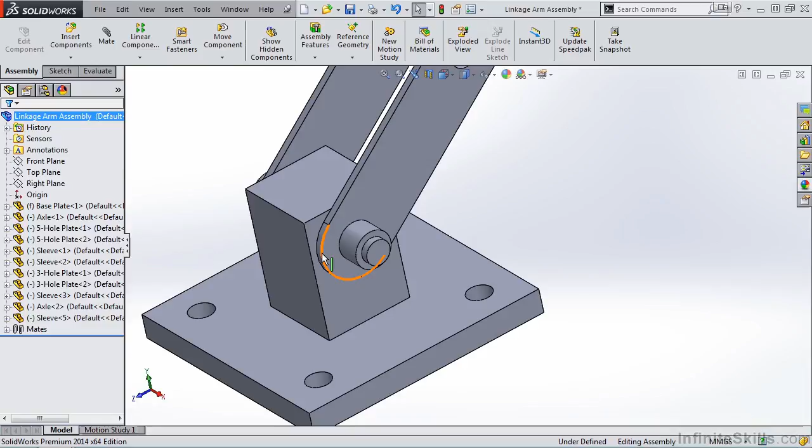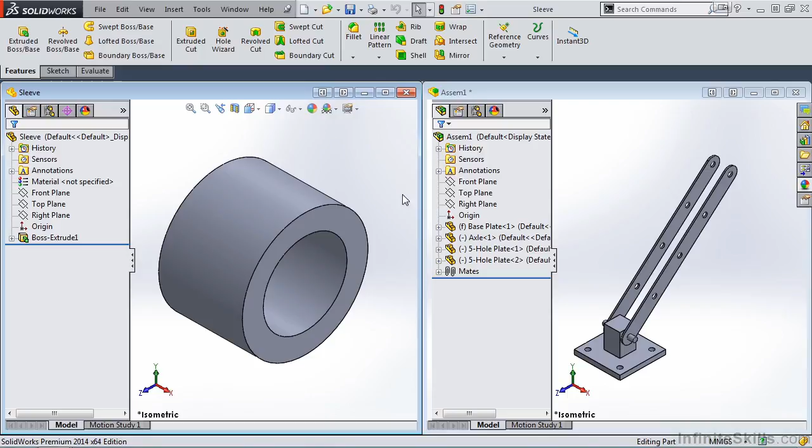That's a lesson that we covered a while back. In order to create the windows, we need to first open the sleeve part file and then select the Windows drop-down menu and tile vertically. Now, this middle window here is my completed assembly. I am going to disregard that and simply expand the two windows, the part file of the sleeve and the assembly we are working on. So once you have these windows up on your screen, try to use smart mates and apply the sleeve to each end of the axle. So go ahead and pause the video and give that a try.

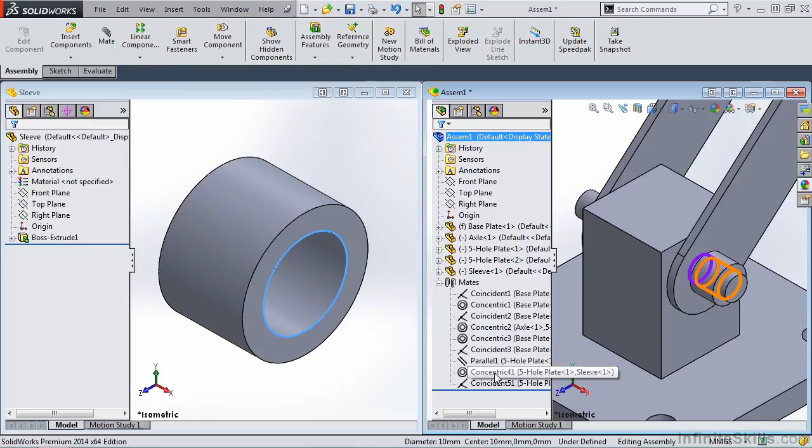Now let's see how you did. I am going to zoom in on this area so it's easier to see. To apply the smart mate, I am going to select this circular edge, hold down the left mouse button, and drag it until I receive the proper graphic and release the left mouse button. And the two mates are applied. In fact, if I expand the mates, you will see the concentric mate and the coincident mate.

We'll rotate the model, and let's do the same for this side. Once again, pretty easy. So now let's expand the assembly we are working in, fit it to the screen, and move on to the upper portion of this assembly.

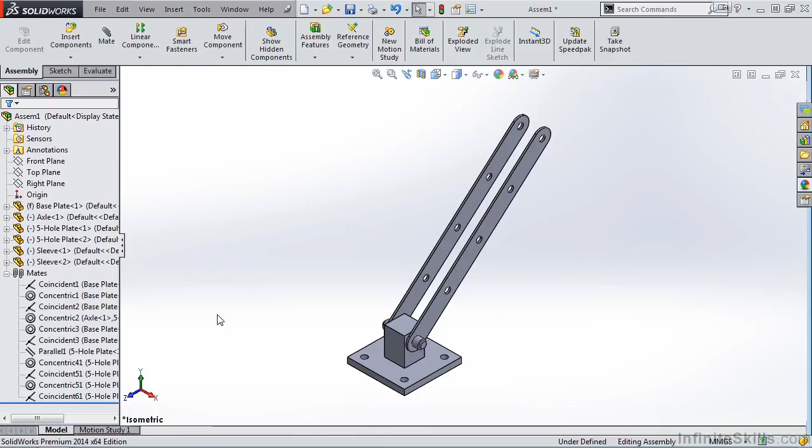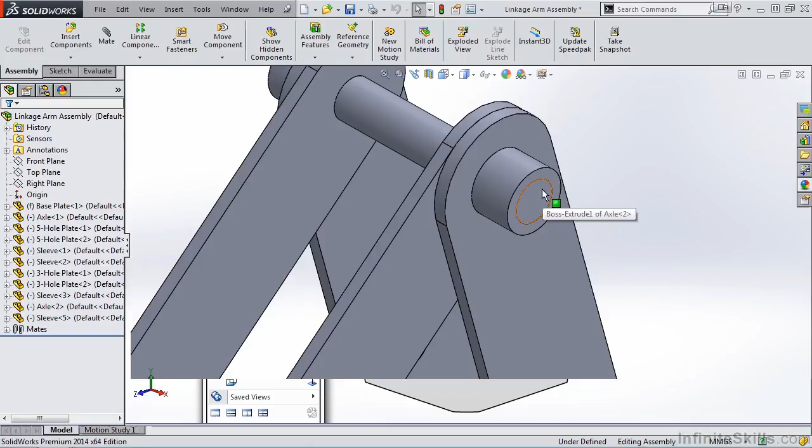Let's go back to the finished model and take a look at what we need to do. We need to insert the axle along with two 3-hole plates and two sleeves. Notice in this application, the face of the sleeve and the face of the axle are flush with one another. So once again, pause the video, insert those components, and after you have that completed, return to the video and we will step through it together.

Okay, welcome back. I am going to go into the assembly I am working on, and this time I will insert the component axle. I'll position it near the end of the 5-hole plate. This time I am going to use the width mate. And if you recall, that is under Advanced Mates. I'll select the width mate.

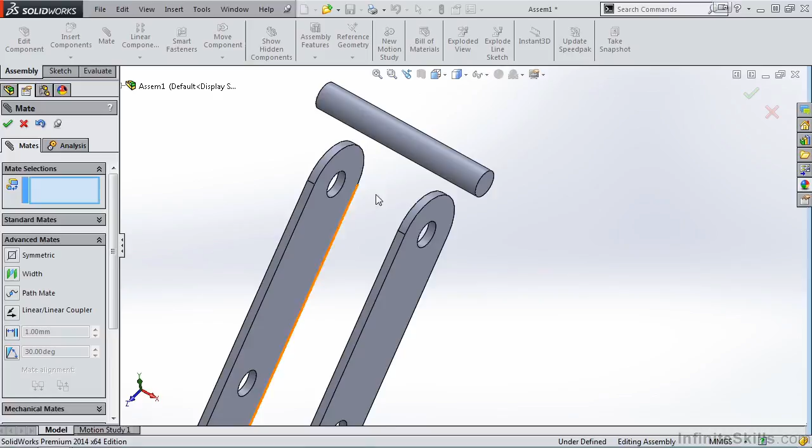And once again, we have the two windows. In the width selection, I'll select the outer faces of the 5-hole plate. And for the tab, I'll select the faces of the axle. I'll accept it and then apply a concentric mate. And now the axle is properly mated to the two 5-hole plates.

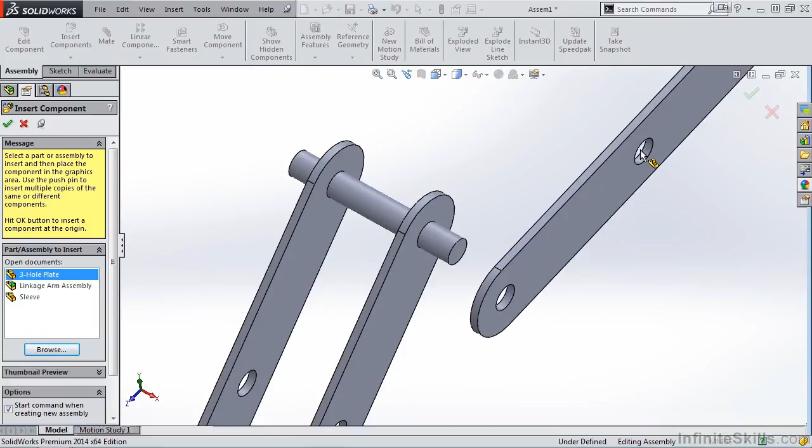Next, let's insert the 3-hole plates. I'll pin open the property manager. And as long as we're here, let's go ahead and insert the sleeves. And then close out of the Insert Component Property Manager.

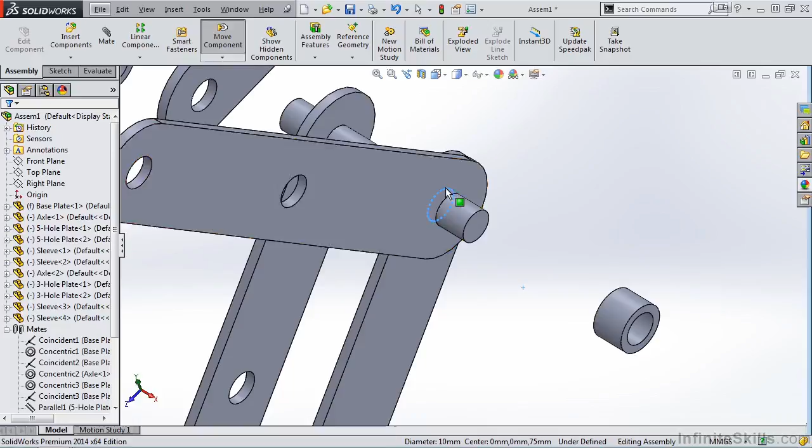So I am going to use Smart Mates just to speed up the process. I will hold down the Alt key. I'll select this circular edge and then this circular edge on the 5-hole plate. I'll roll the model. Do the same for the sleeve. Rotate the model. Let's do the same for the opposite side. And the collar.

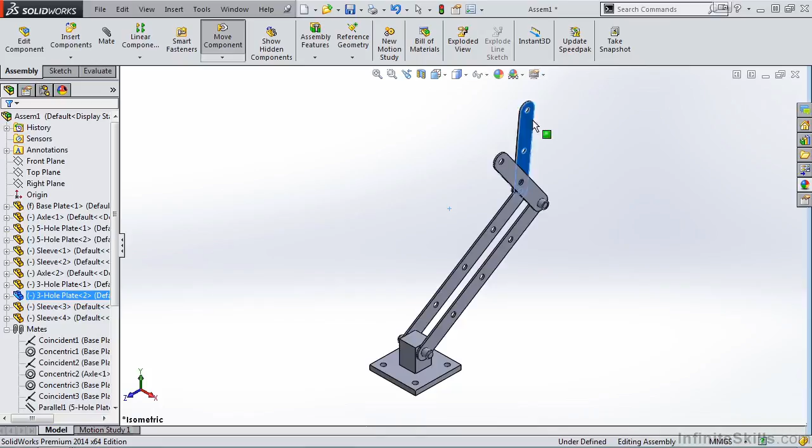We'll fit it to the screen. Let's rotate these couple components. And once again, we want these two 3-hole plates moving together. So I am going to zoom up and apply a parallel mate. And there we have the completed assembly.

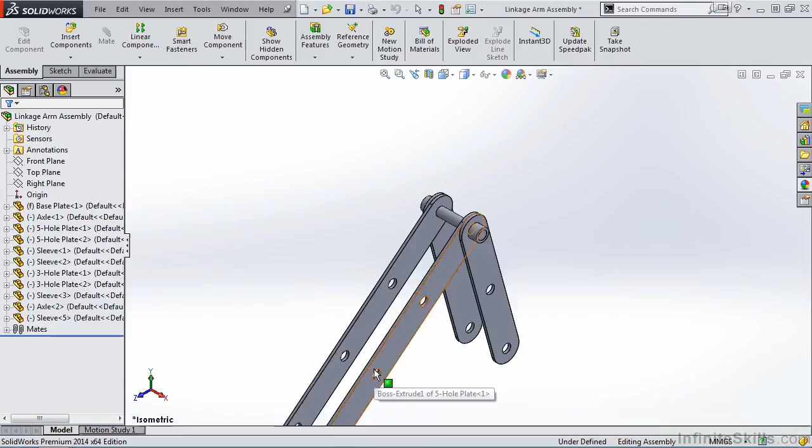Now I want to add a couple angle mates. So if we go back to the completed assembly and we fit this assembly to the screen, let's take a look at the angle between this 5-hole plate and the base plate. In order to do that, we need to expand the mates. And it looks like it's currently suppressed, so I'll unsuppress it. And if I double click in the mate, you see the angle.

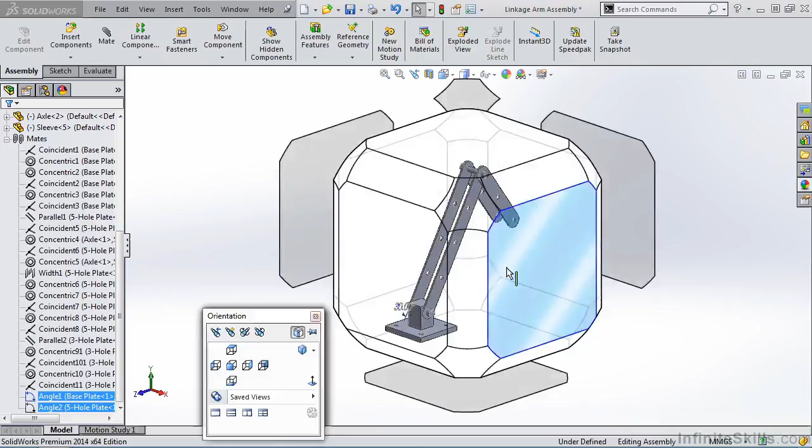Let's go to right-hand side view. You see the angle is 30 degrees to this face here. So from the top face of the 5-hole plate to this face of the base plate, we have 30 degrees. So let's give that a try.

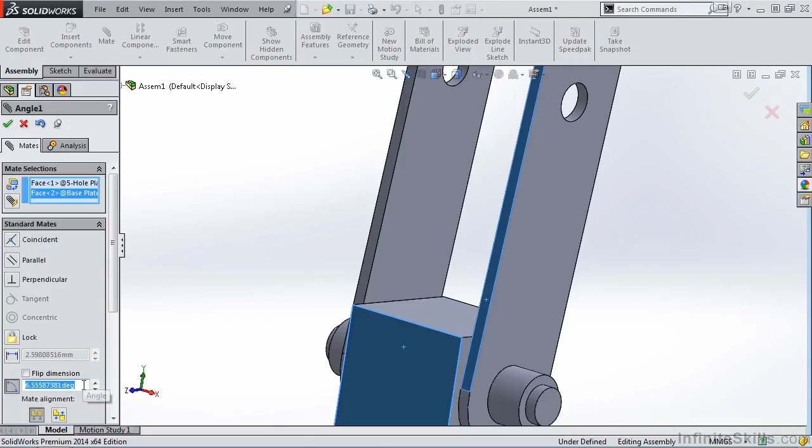I'm going to zoom up and then go to my mate. Select the top face of the 5-hole plate, the front face of the base plate. I'll select the angle mate in the property manager and key in a value of 30 degrees. Now my orientation is correct.

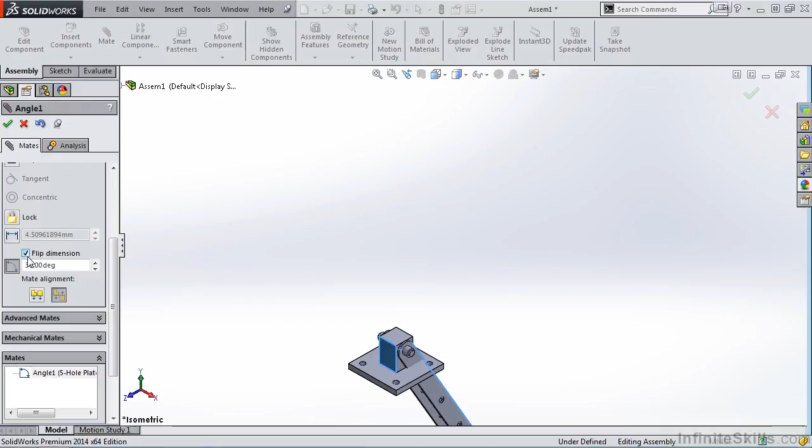I did want the 5-hole plates to extend off in this direction. However, if it were not correct, what I would do when I am inside of that mate, I would simply toggle the mate alignment buttons and the flip dimension. And again, there's 4 possibilities there. So you need to play around with this a little bit until you get the result you are looking for.

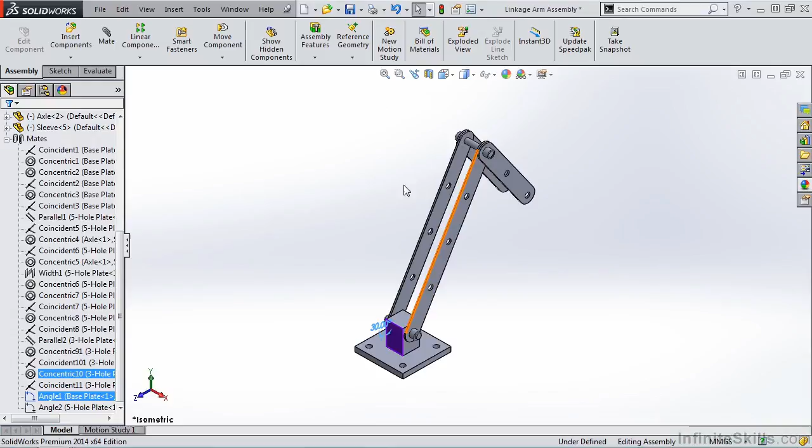Okay, that's one angle mate applied. Now let's go back to our finished model and take a look at the second angle mate. I'll zoom out. And it looks like our second angle is 65 degrees between the 2 faces. So let's duplicate that.

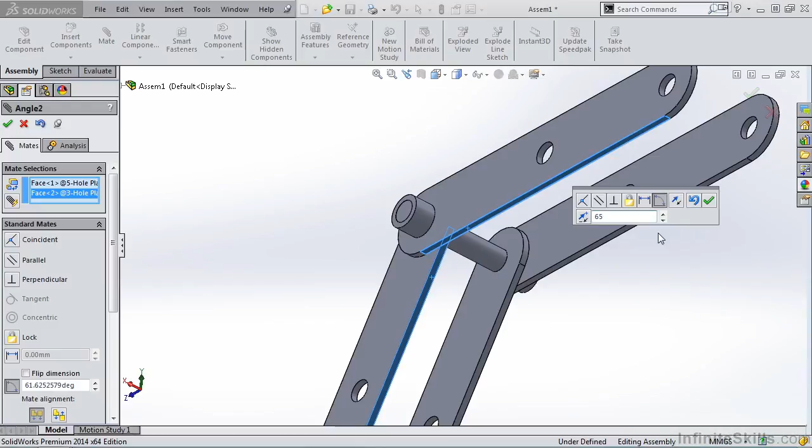I'll roll the model once again. Go to the Mate Property Manager. Select the bottom face of both of the plates. This time I'll use the pop-up menu. I'll select Angle and key in 65 degrees. Close out of the Property Manager and fit the assembly to the screen.

Now, we just worked through completing a simple assembly with a number of different mates. Now, obviously, if you put some thought into this, because this is symmetrical, I could have built or constructed this one side here and then mirrored it to the other side. So that would be another option too. But that gives you some practice and some first-hand experience for how to create a basic assembly.